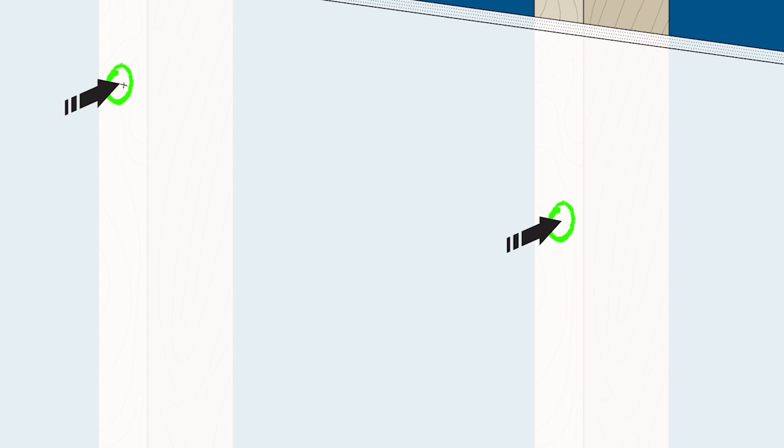First, we'll start by attaching the wall bracket. Use your locator to find all the studs in the wall where your cabinets will hang. Next, mark the sections where you'll attach the wall brackets 1 inch above your preferred height for the top of the wall cabinet. Make sure to inset from the edge of the cabinet just enough so that it can be hidden with the top trim if you'd like.

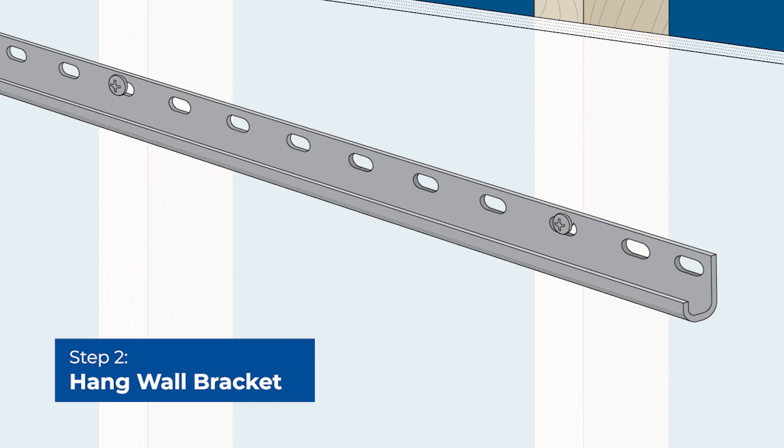For every 2-foot section, attach it to at least 2 wall studs. If this isn't possible, then make sure to use a couple of the included drywall anchors. Ensure there's either a stud or an anchor support within the 3 pre-drilled holes from each end of the bracket to secure your support and keep proper leveling.

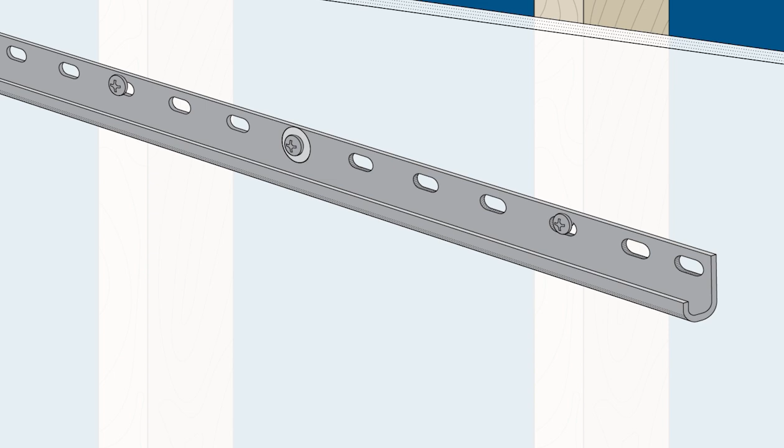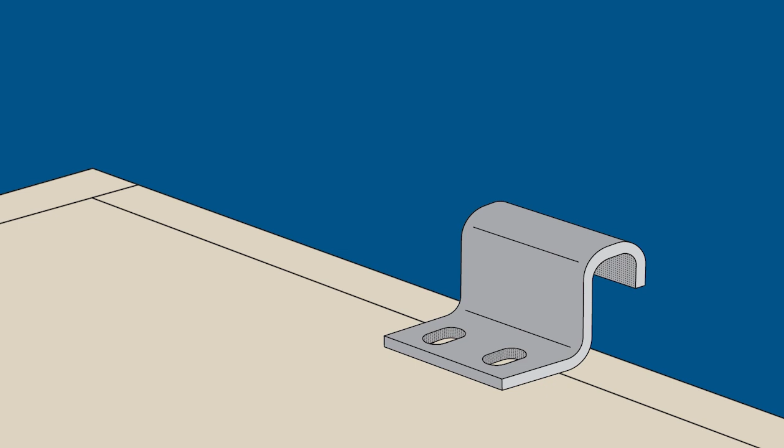Next, we'll install the brackets on the top of the wall cabinet. Start with the back of the brackets 1.5 inches from the back of the cabinet using the included 3/4 inch screws. For the best hold, make sure you don't attach to the end grain of the cabinet side.

The top of the cabinet needs to be flush with the sides. If it isn't, cut a scrap piece of plywood or lumber to the correct thickness to make it flush and securely attach it to the top of the cabinet.

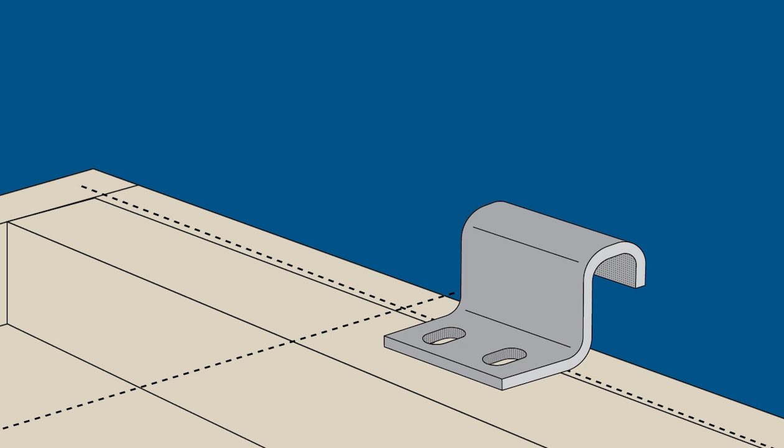Your cabinet top should be 1/2 inch thick or more. 2 brackets will be enough if the cabinet is 24 inches wide or smaller. You might need more if the cabinet is wider, taller, or deeper than typical wall cabinets, or if you're building a custom cabinet of your own design.

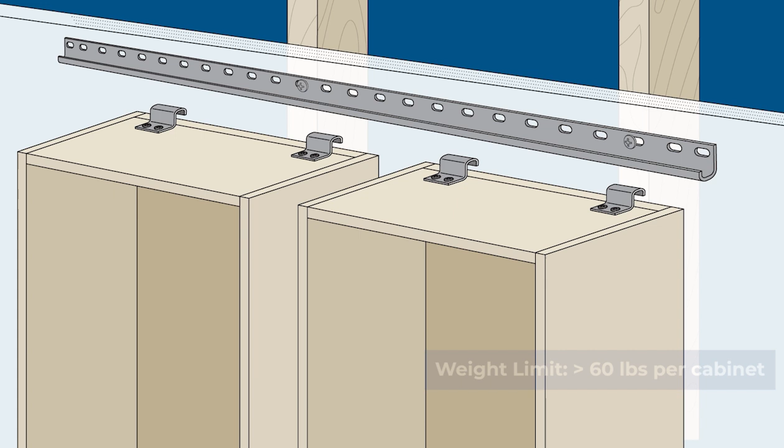Now it's time to hang the cabinets. Keep in mind that the cabinet installation system has a weight limit of 60 pounds. Lift your cabinet and hang it in place on the wall bracket. This will support the cabinets while you get them positioned, leveled, and permanently attached to the studs in the wall.

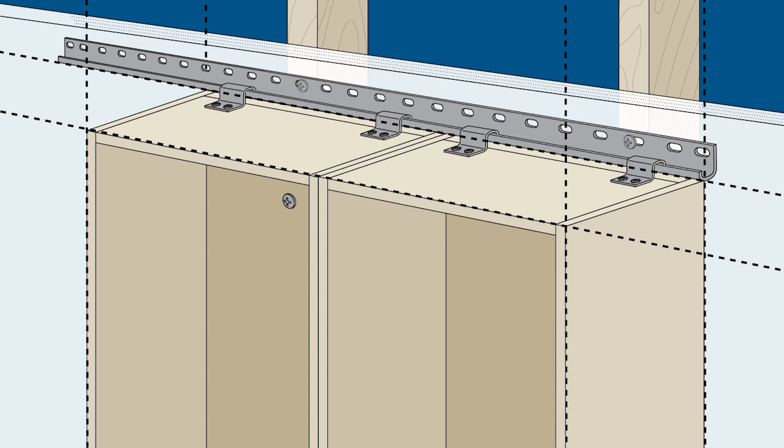Then, if you'd like and if space allows, you can remove the cabinet brackets after everything has been secured to the wall. And that's all there is to it.

Whether you're hanging just a few cabinets or an entire kitchen run, hanging perfectly placed wall cabinets with this system just got a whole lot easier, and you can do it by yourself in a fraction of the time. So why wait? Get your own cabinet installation system today.